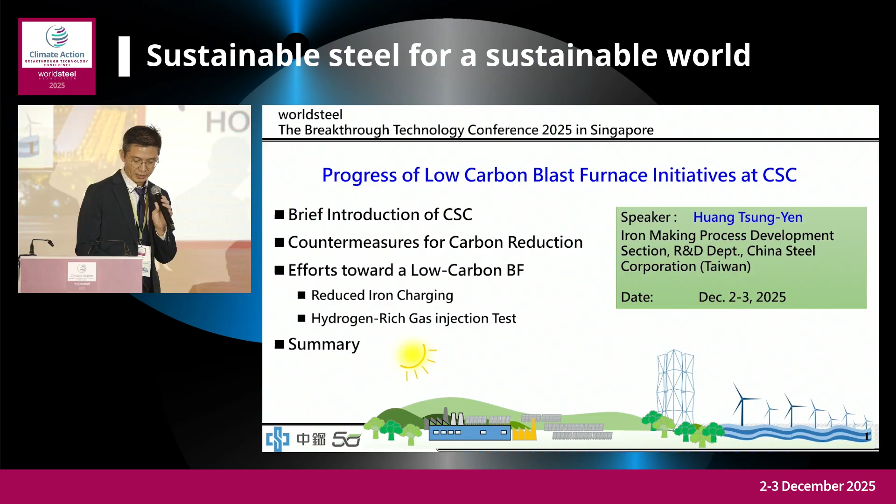CSC Group is the only integrated and largest steel mill in Taiwan. Our annual hot metal output is 15 million tons, produced by 6 blast furnaces and 1 EAF. The production process includes from raw materials to blast furnace iron making, to BOF steel making, and all the way to the product.

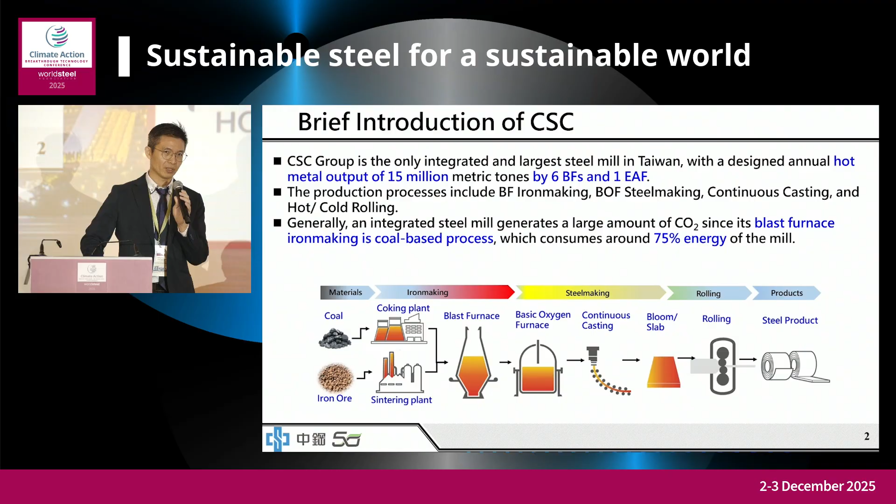Our iron making is mainly based on the blast furnace, which consumes about 75% of our energy and accordingly generates carbon dioxide.

This figure shows our commitment and the pathway of our decarbonization countermeasures. At this moment, our commitment is a 7% reduction on the basis of 2018 CO2 emissions. We try our best to optimize energy efficiency and use renewable energy, so we are confident that we can achieve this year's commitment.

For the next stage, our commitment is a 25% reduction by 2030. Firstly, we will charge low carbon ferrous material into the furnace, and then we will use hydrogen-containing gas to replace part of the coal injected into the furnace.

The third measure is that we will collect our process off-gas and provide it to our neighbors, who are petrochemical companies. They can convert our off-gas into a chemical product. The last one is that we will increase the addition amount of scrap in the BOF process.

Among these 4 countermeasures, we will adopt the ones that are more economically feasible into our daily operation. Further in the future, if green hydrogen and green electricity become available at a reasonable cost, we will consider the route of DRI to EAF or DRI to smelter.

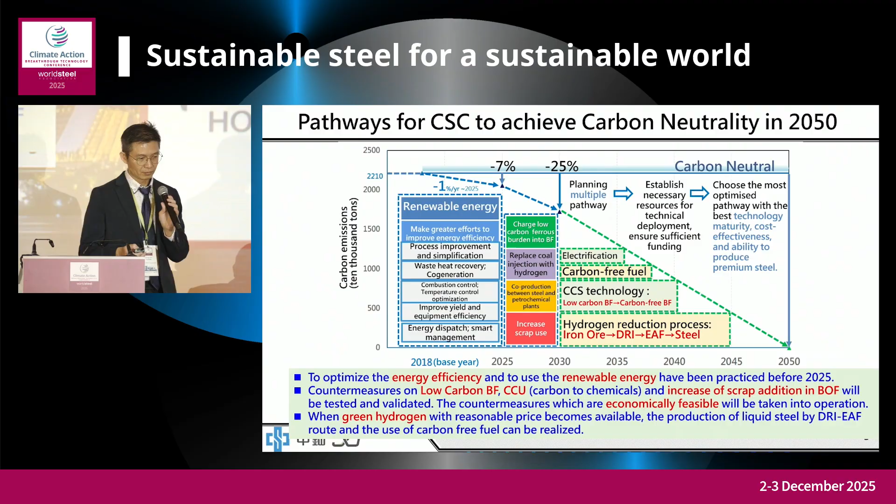For hydrogen-content gas, we erected tuyere injection equipment for testing COG and natural gas. Later, I will talk more about the HBI charging and the tuyere injection.

For the top gas, we have built a pilot plant to capture CO2. In addition, we collaborate with academic professors and research centers to study how we can reuse the top gas after CO2 separation.

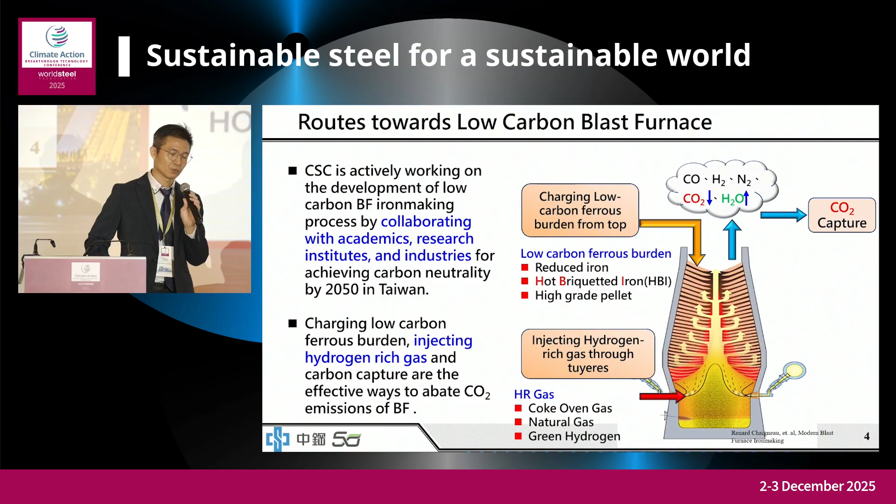Now I would like to share our development and trial results on HBI. As we know, the size and density of HBI is much higher than regular ferrous materials. The length of HBI is about 120 millimeters, while the mean size of lump ore and sinter ore is about 22, and pellet is about 10.

To ensure the HBI can be safely conveyed to the top silo and can be smoothly discharged out of the silo, and most importantly, that the HBI can be precisely discharged to the target position of the top furnace, we carried out a real-scale particle flow and movement simulation.

Before running the simulation, we calibrated the physical properties of the digital particles using our own experimental results, such as repose angle, static friction coefficient, bulk density, and restitution. These are our real experimental results, so we are confident that the digital particle model is very close to the actual behavior.

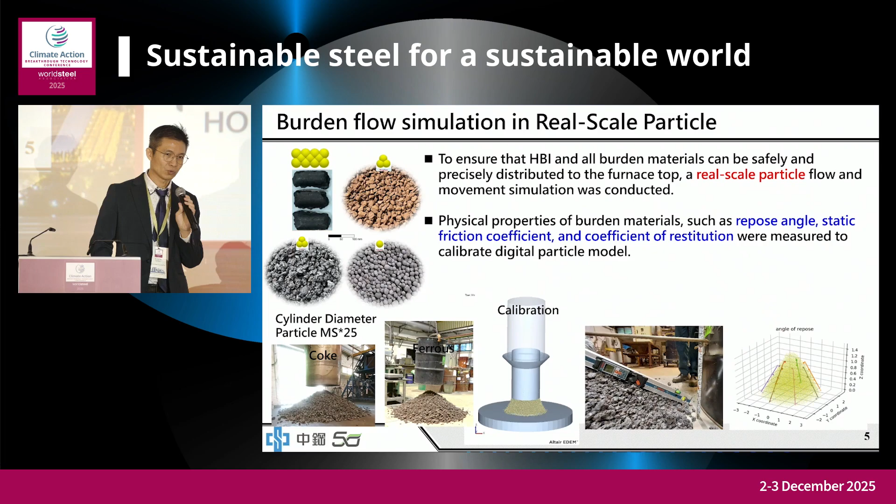Our simulation is from the materials on the conveyor belt, filling into the top silo, discharged out of the silo, and finally distributed to the top furnace. These simulations are all in real scale geometry. The HBI is in the original size and is delivered by the conveyor belt to the top silo. In this simulation case, we use the 150 kilogram HBI to replace the sinter ore.

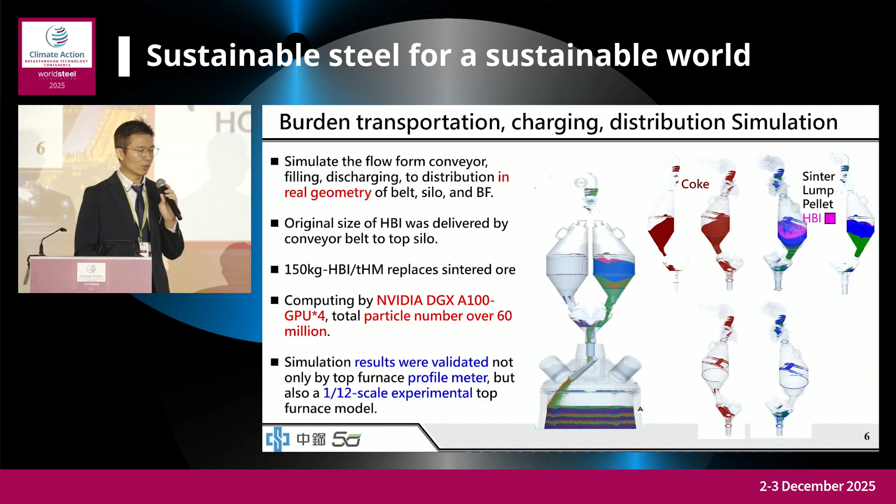We run this simulation on an NVIDIA DGX computer equipped with 4 A100 GPUs, so the total particle number can be over 60 million. In my point of view, this simulation is really vivid. This simulation result was validated not only by the top furnace profile meter, but also by a 1/12 scale experimental top furnace model.

Totally, we distribute 6 layers of burden on the top furnace. During the ferrous charging, we observe that the coke was pushed to the center area. To analyze the material distribution and its characteristics, we divide the top furnace into 10 equal rings. We found that the HBI dispersed uniformly from the wall area to the center, and this color represents HBI. We also found that the amount of HBI at the center is slightly higher than in the wall area.

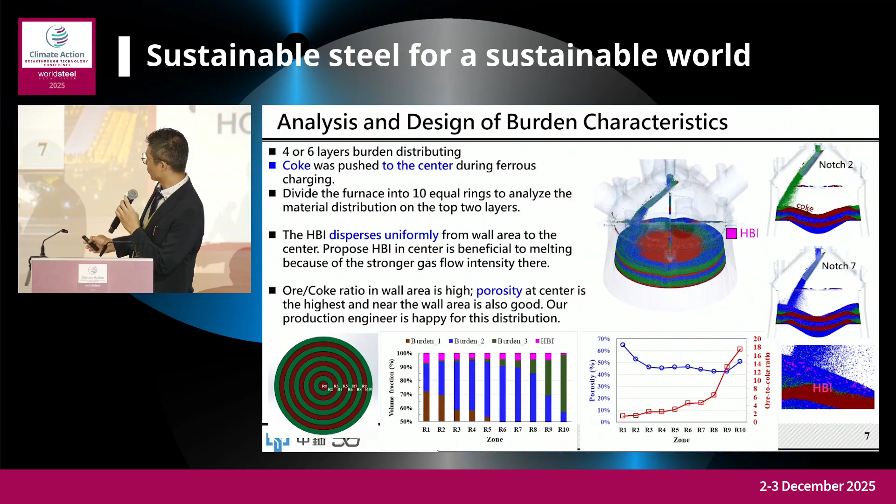This figure shows the ore-to-coke ratio and the porosity profile. We can see the ore ratio at the wall area is high, and the porosity at the center is the highest, while the wall area is also quite good. Our production engineer is very happy with this distribution.

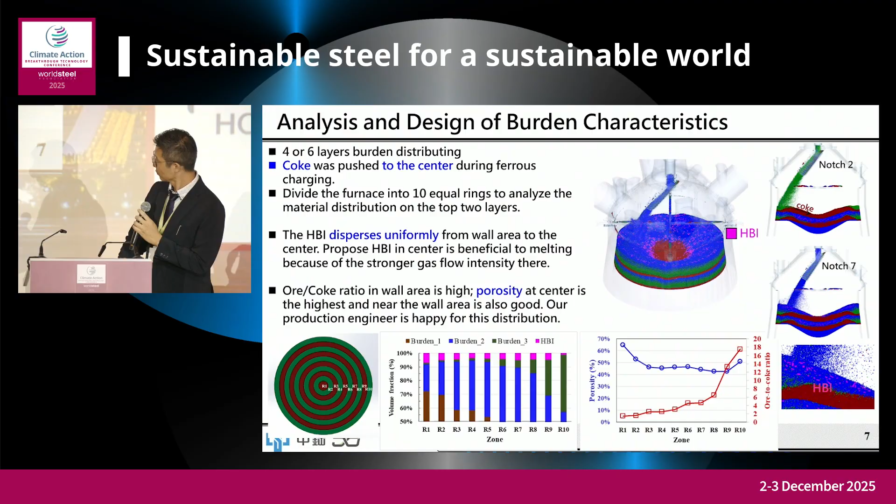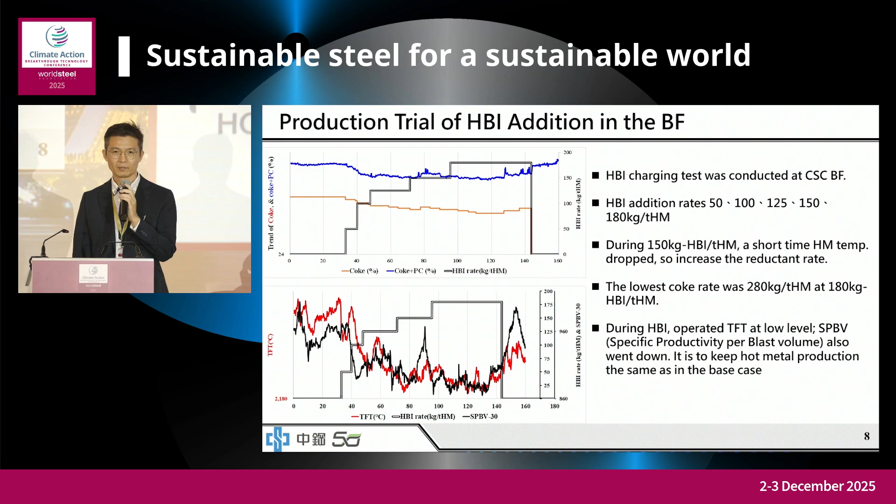Following are our trial results, operating results. The HBI charging rate increased step by step from 50 kilogram to 180 kilogram per ton of hot metal. During the HBI charging, the lowest coke rate was 280 kilograms per ton of hot metal. We operated the calculated theoretical flame temperature and SPBV at a lower level because we wanted to keep our hot metal production rate the same as our base case.

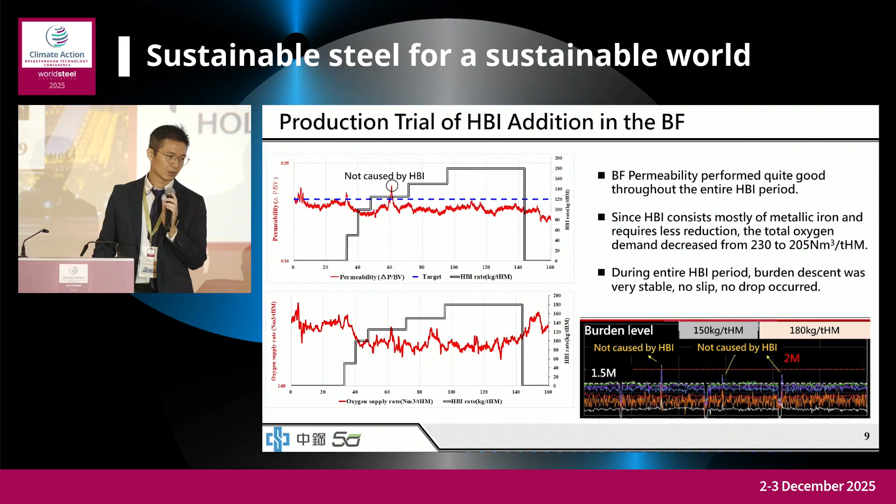We saw the permeability was quite good throughout the HBI period. As we know, HBI mainly consists of metallic iron, so it requires less reduction. The total oxygen demand decreased from 230 to 205. Also, the burden descent was quite stable, with no slips or drops occurring.

This figure shows our HBI decarbonization performance. The lowest coke plus PC rate is 419 at the 180 kilogram HBI addition. With increasing HBI rate, the CO2 reduction rate decreased accordingly. After we consider the in-plant energy balance, such as top gas heat and utility usage, the average reduction rate is 1.5 tons of CO2 per ton of HBI addition.

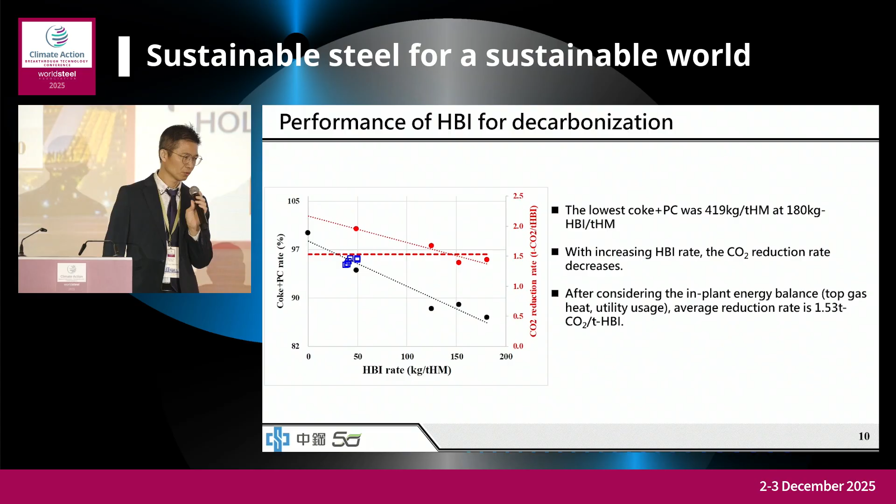Then I will share about our one-tuyere injection test. So far, CSC operates all of our blast furnaces with PC injection and have no experience with gas injection. So to firmly develop hydrogen-rich gas injection technology, we prepared a one-tuyere gas injection system. The first objective is to define the safety control sequence for gas injection and further to evaluate the combustion characteristics of natural gas and COG.

We have two individual injection lines: natural gas and COG. The natural gas pressure in our supply network is 6.3 kilogram per centimeter square, while our hot blast pressure is about 3 to 4, so the natural gas pressure is enough to directly inject into the furnace. On the other hand, the COG pressure is at atmosphere, so we need to use a compressor to boost the COG pressure to about 8 bars. In addition, the COG contains tar, and after long time operation, the tar will deposit inside the pipe, so we will use steam to wash the tar.

This picture shows our compressor, which is a reciprocating type. The maximum flow rate is 800 normal cubic meters per hour, and the footprint is about 6 meters by 3 meters. That is a two-stage compression: the first stage compresses to 1.5 bar, and the second stage compresses to 8 bar. If the outlet pressure does not reach our set point, there is a recirculation valve, and the valve will gradually open to recirculate the partially compressed gas into the first stage until the outlet pressure meets the target.

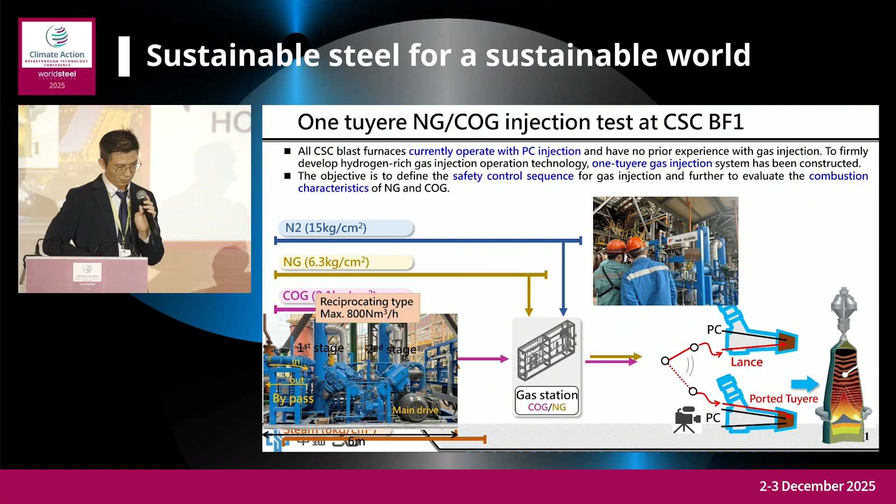This picture shows our gas valve station and natural gas line here and the COG line here. At the entrance, there is a gas pressure gauge, and the outlet also has a pressure gauge. Through the pressure difference between the entrance and outlet pressure, we can understand if there is a gas leakage inside the gas station, and we use the outlet pressure to decide if it's under normal injection or if we have to stop the fuel gas.

In case an abnormal situation happens, these two valves will automatically close and open this vent valve. Most importantly, we have a high pressure nitrogen system. This is fail-open and immediately opens, and the nitrogen will flush the pipe all the way to the furnace.

For the injection method, we individually test the lance injection and the tuyere injection.

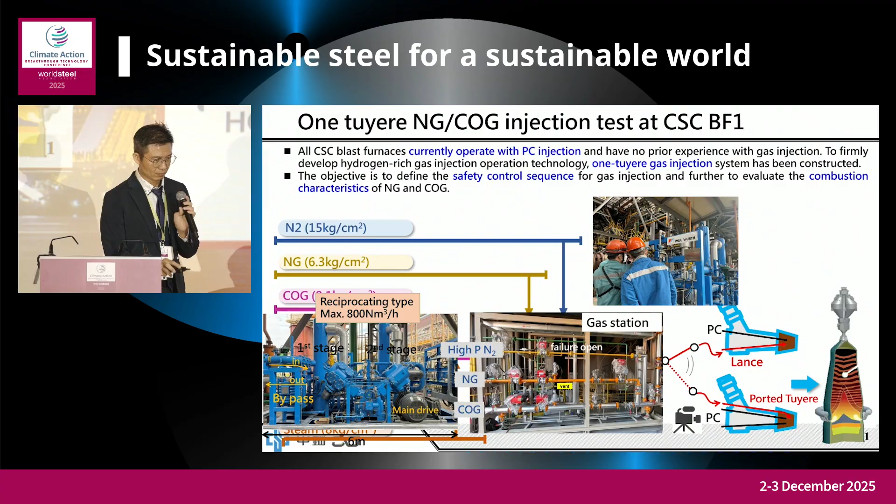This slide compares the raceway dynamics between the lance and the tuyere port injection. Here we set up a borescope camera to observe the raceway behavior. The upper row is the lance injection video, and the lower row is the tuyere port injection.

During the experiment, I closed the PC, and the first column is just a small amount of nitrogen flushing the pipe. We can see the brightness is the highest compared to the fuel gas case. Then, as we increase the injection rate from 220 to 600, the combustion luminous intensity fades gradually.

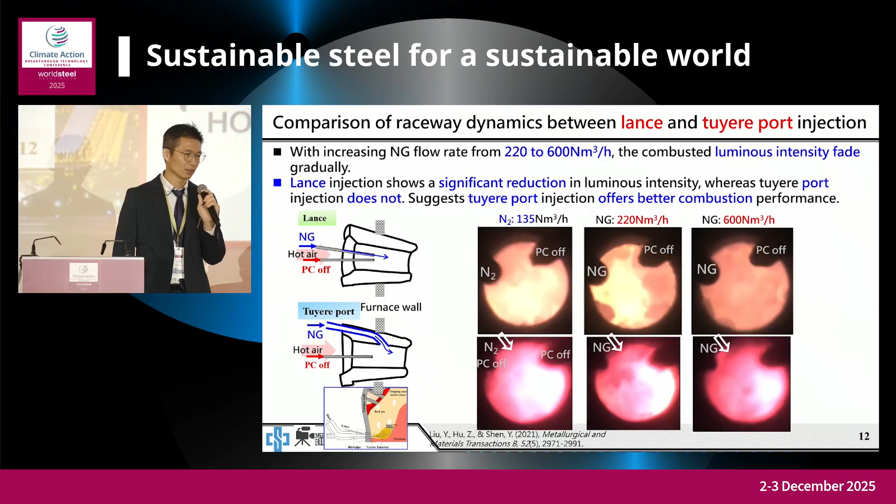When we compare these two methods, the lance injection shows a significant reduction in luminous intensity. On the other hand, tuyere port injection does not. So we suggest that the tuyere port injection offers better combustion performance because of the good mixing between natural gas and the hot air.

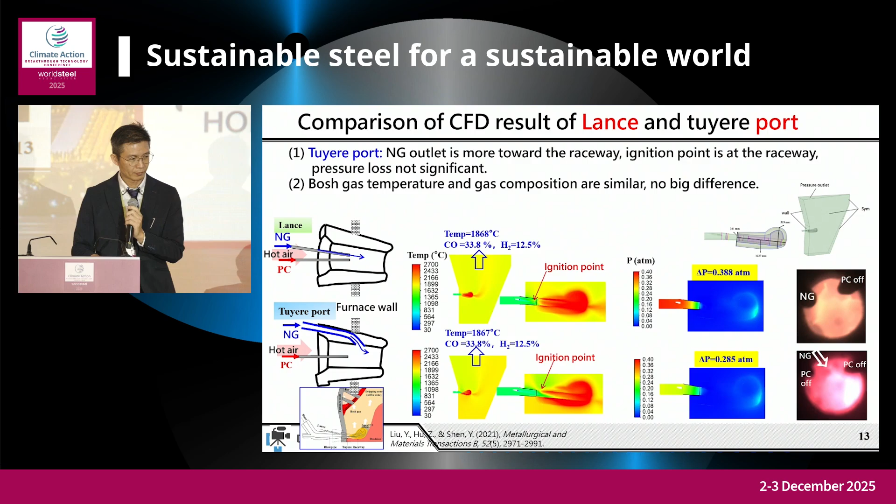I also noticed that if I count the total hydrogen atoms, natural gas has a higher hydrogen content than COG. So currently, COG and natural gas are the available hydrogen-content gases we have. So far, I still do not know which one will not impact our normal operation too much.

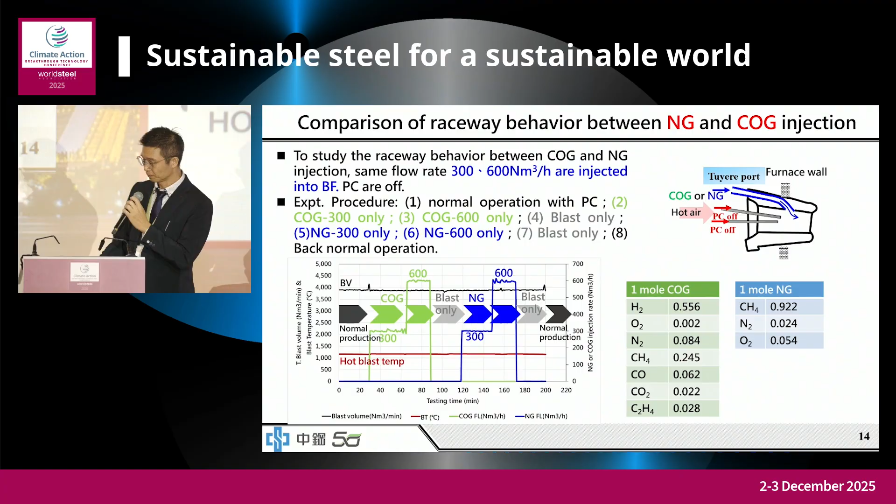As the injection rate increased to 600, the raceway gradually becomes darker, especially at the outlet position of the gas port, likely due to the cooling effect of the room-temperature injectant. At equal injection rate, COG shows higher brightness than natural gas. I believe that the hydrogen and carbon monoxide content in COG can be combusted directly with hot blast in a very short time, while natural gas with methane requires endothermic cracking before burning.

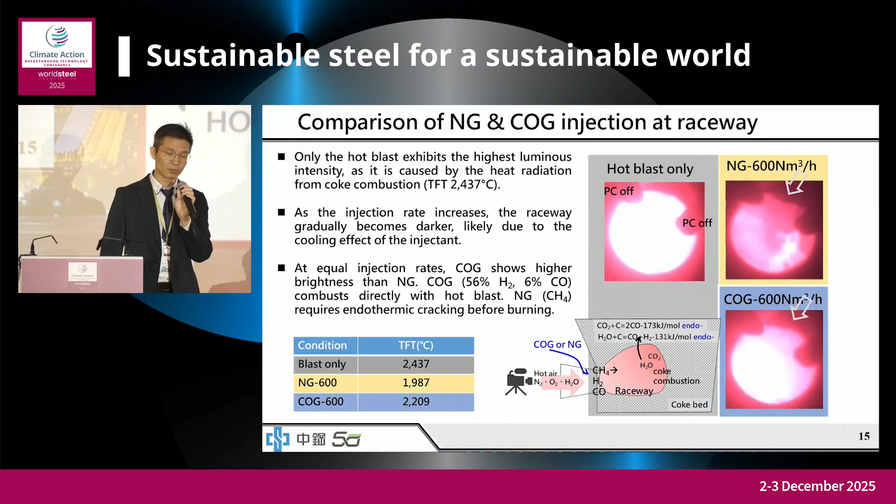We can see after COG injection, the hot blast drops and returns to normal as the COG stops, and then the blast rate keeps decreasing during the natural gas injection. This behavior suggests that the injection gas combusts very, very soon inside the tuyere here, and the combustion gas volume expands sharply, creating additional flow resistance at the tuyere outlet and reducing the blast rate.

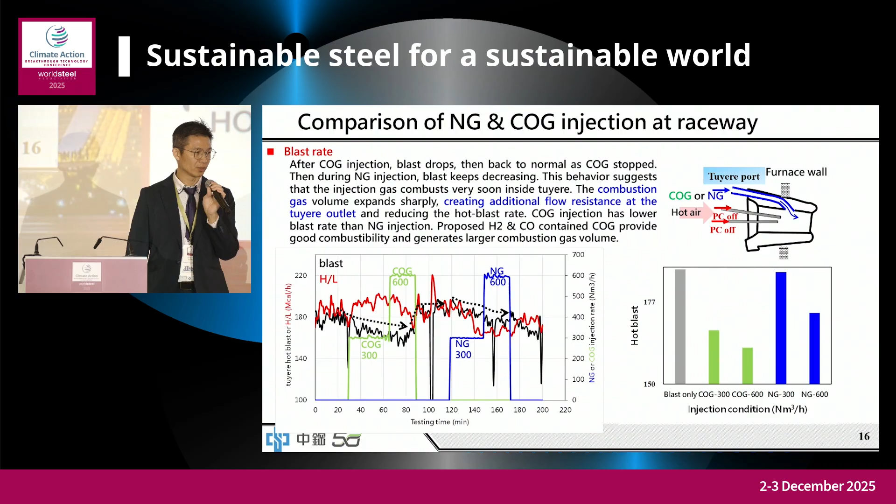The red color chain shows the heat loss. Here is a water jacket. Heat loss means how much heat is taken away by the cooling water. And if the heat loss decreases, that means the gas temperature inside the tuyere is lowered.

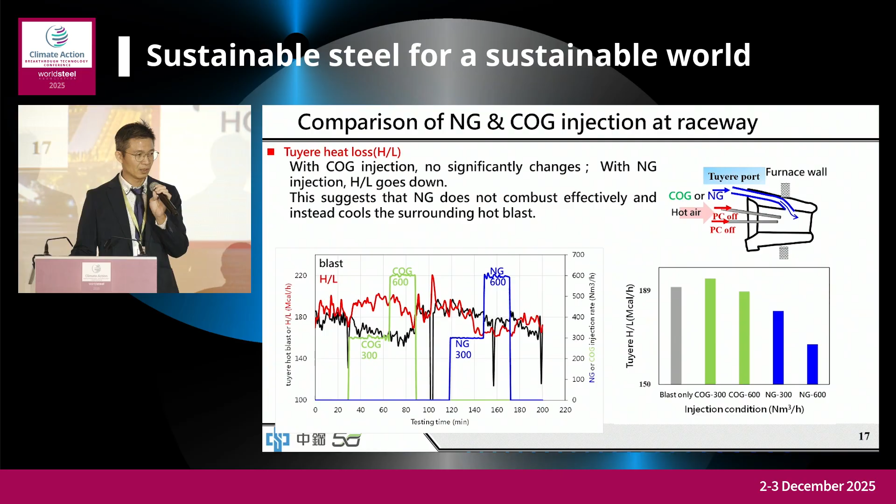We can see that with COG injection, there are no significant changes. But with natural gas injection, heat loss goes down. This suggests that natural gas does not combust effectively and instead cools down the surrounding hot air.

Finally, to give a summary: under the decarbon pressure, CSC has planned a strategy to cut emissions in the medium term, and in the future, to reach neutrality.

We have developed technology for charging low carbon raw materials such as HBI, reduced iron, and pellets, and achieved comparable results. In addition, a natural gas injection test was conducted to validate the safety control sequence.

We will erect a demonstration plant for natural gas injection to validate how effective it is at reducing CO2.

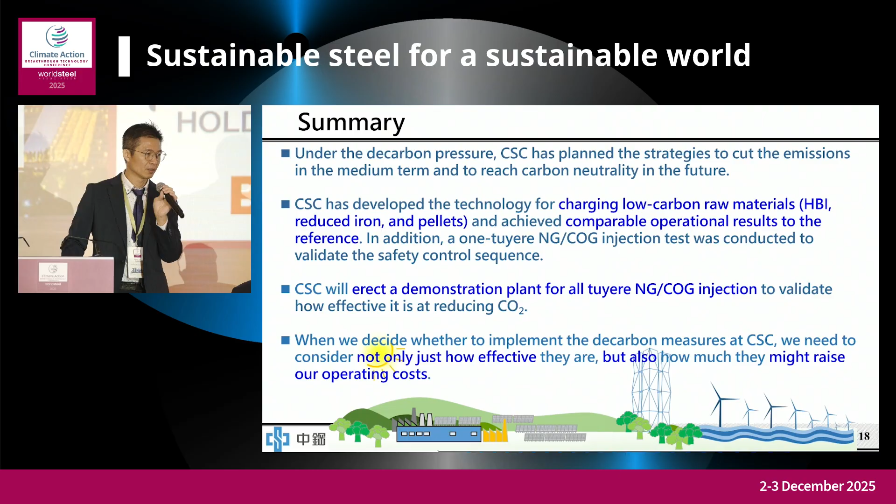When we decide whether to implement decarbon measures, we need to consider not only how effective they are, but also how much they may raise our operation cost. Thank you.

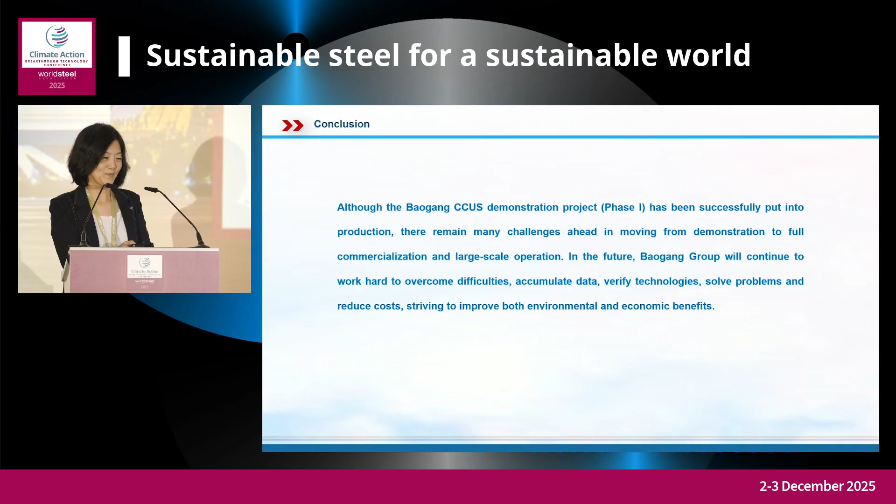I wanted to ask, if I could, whether your capture technology is something you developed yourselves, or something you purchased from another supplier?